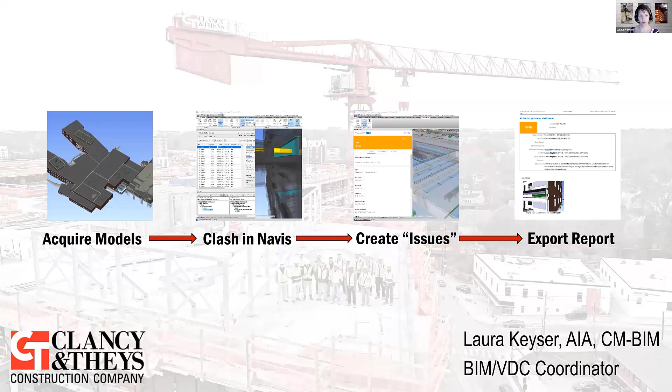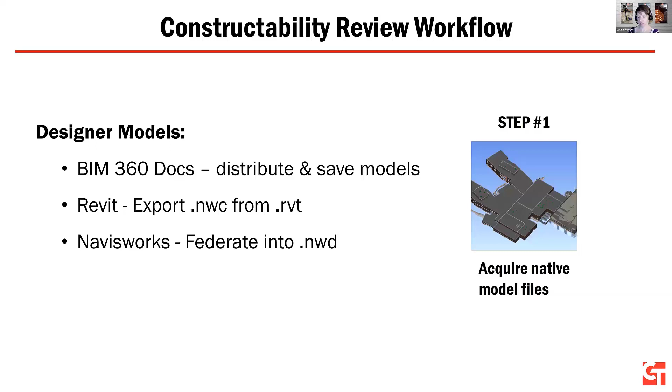Okay, so step one, I think we're all pretty familiar with this. So Ratio gave us access to their, and I'm using BIM 360 Docs, so same as what Scott said, just put cloud over top of any of this stuff to ease any confusion. So I was able to get their designer models. I just exported out NWCs. I did make an NWD file in Navisworks so that I could use this issue tracking.

Had all my models together, and then clash detection. Gautam kind of touched on this. I'm creating sets for major system comparisons. Anytime, like Heather and Gautam were talking about, doing this kind of review at design, you really have to keep in mind what you're looking at and what stage the design team is at to really eliminate a lot of false positives.

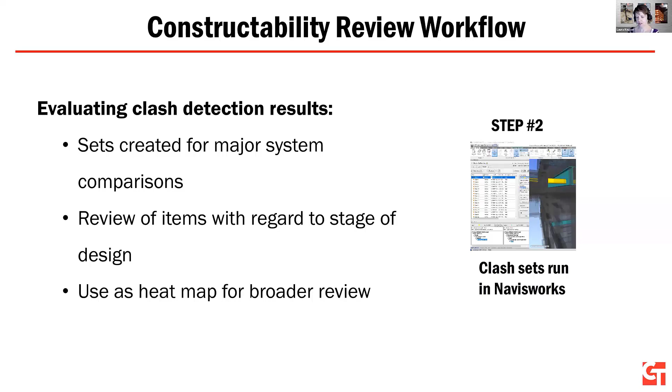I also like to use it really as a heat map for kind of a broader review of what's going on. So I ran my Clash in Navis just to get an idea of what was going on within this project. Okay, so the next step, here's where I'm actually using that coordination issues add-in with Navis. So in Navis, I can create an issue really easily. I'm going to show some screenshots of that.

But some other keys I did was I did save viewpoints, and I also took screenshots so we had an image to put in that report. So just some additional steps I was doing along the way to get the desired end result. Typically, we would do this just in Navis, make viewpoints, and then use something like Word to create the report.

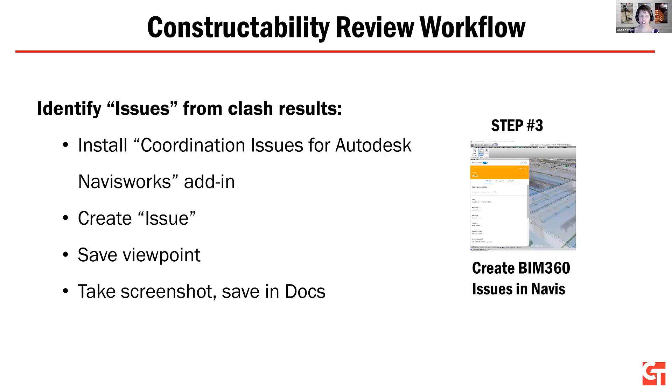We wanted to try issues in this project, which we are doing a lot more within the company in general, really moving to the Autodesk Construction Cloud. So this was a way to get our operations and pre-construction teams into the model, and it's a way to see the issues that we're creating.

So when I was actually putting together this presentation, I was trying to do another test, and I was like, why can't I create an issue in this other file I created? So a few things, like what you see here on the right, you can only use it for an NWD file you're opening through the desktop connector, or what Scott showed with the model coordination. So keep that in mind.

And like Heather mentioned, you also have to have the right permissioning. So same thing, I was like, why can't I create an issue? I didn't have permissions on that test project I was looking at.

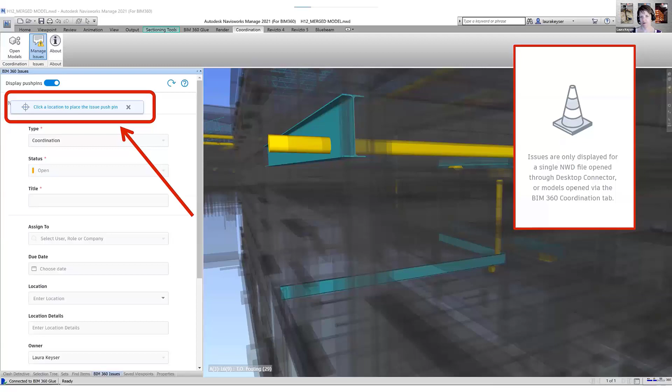So very similar to what Scott was showing, in this process we are just dividing clashes in here. We're not really using that. We really divide between constructability and coordination. And that way, as we're working with the design team and the owner, we can say, okay, these are coordination issues that we'll figure out, we want to identify them now because we can track them as we continue to go through design and construction.

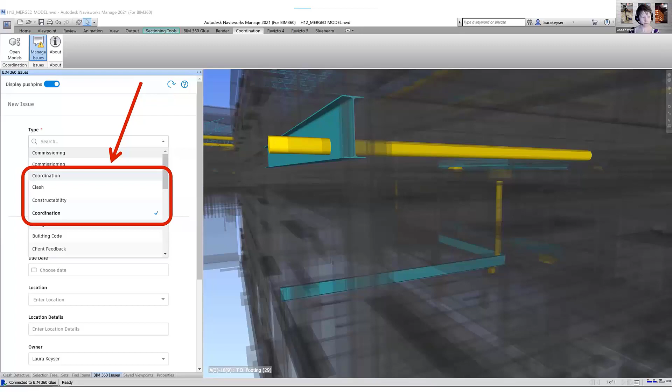Or this is a constructability issue that we really need to figure out now, like a situation like we're looking at right here. I also put in locations. I was kind of toying with this. It didn't quite work as I expected, I think because of how I pulled these models together, but it did give everyone a good idea of where we were talking about.

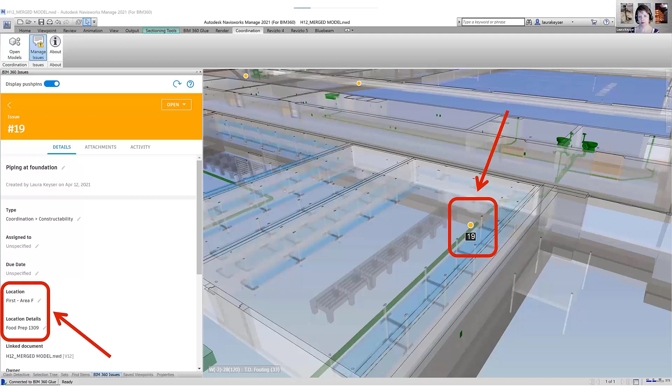So I create my issue in Navis with that push pin, and then I can see it in the model. And this is the point where I would take my screenshot in order to have a view of what it's going to look like. I'm also adding in a description. So all this information that Scott was touching on in his presentation, just to make sure that everyone knew what we had going on here.

So now I'm going to flip. Now I'm in BIM 360 document management, the model web viewer. So I go to my issue, and this is what I see. So this is why I've created these different viewpoints and screenshots, because it doesn't save any of the sectioning or any of the visibility settings, things that are hidden, transparencies, things like that.

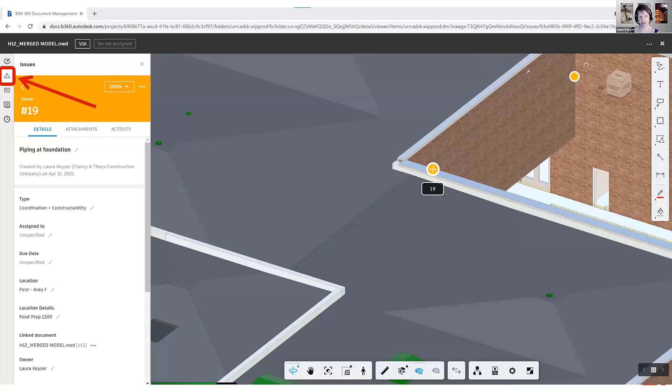But it does actually give all the information. So our project management team was able to come in here and see these issues. Within Navis, similar to what Gautam's doing in his typical coordination project, I was creating viewpoints for each issue and naming them the same number. So this was just a manual process just to keep it coordinated.

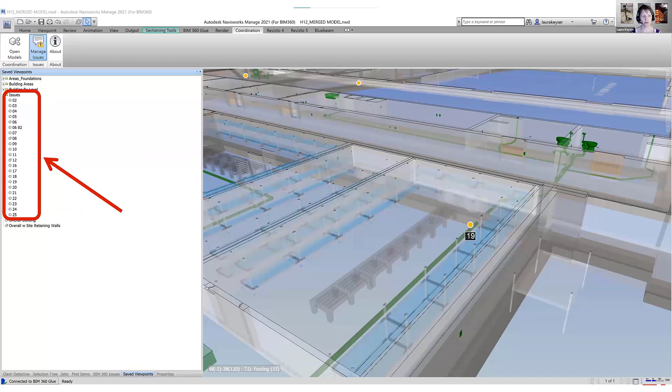It was really easy on this because there weren't a lot of issues we were identifying in this process. I might look at some other ways to do that depending on the scope of what I'm doing, but for this project, it actually worked out pretty good. Like I said, I'm then creating a screenshot and I am using the attachment feature.

So here I am back in the web interface. You can see my list of issues back here. I can create attachments and I can drag and drop different file types into here. That way, when I'm producing my report, I have that image of what the actual issue looks like with everything hidden and all my visibility settings and all that good stuff.

When I'm in this model viewer and I'm in my sheets and views, here I can see if I go to my issue viewpoint, it takes us right to the viewpoint. I think maybe Heather mentioned this, that overall the navigation in the 360 viewer is pretty easy, but because you can't save a view, sometimes it's hard for someone who's coming into a big model like this to just get started at a specific point. So by having these viewpoints, it just gives someone a starting point to move forward, especially when I'm talking about a specific issue. They can see it a little bit more clearly.

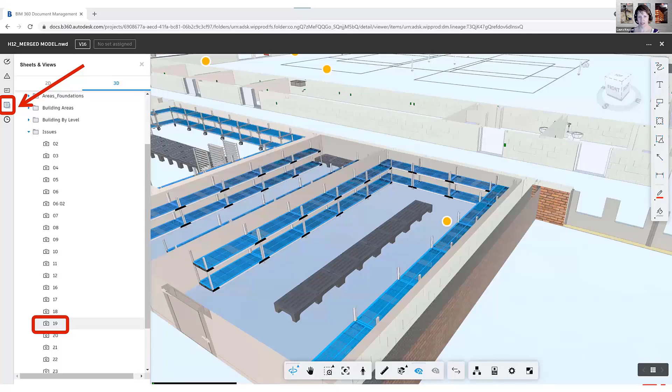Once we got all that done, then we had to run a report. So there are two different types of reports, which I found out, an issue summary report and an issue detail report. While I was actually working on this, we happened to have an internal VDC meeting. So prior to that meeting, I got in here. Here I am in document management. I go up to my export button and I exported a report. And this is what I got. And I was like, well, it gives me the title and the description, but I really want images.

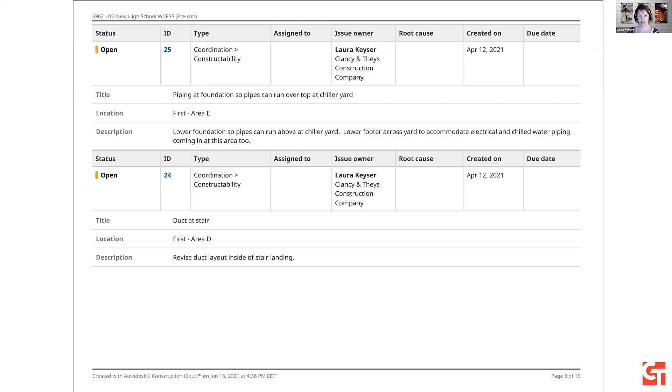And so I think actually Matt Rachers in this meeting today, he was the one who mentioned there's another way to do a report and it gives you all that other information. I wanted to mention this because it's really kind of hidden. So you actually have to go to the Insight tab, not Document Management, and then down on the bottom left, you see Reports. I never would have found this had someone not actually told me about it. Once I get in there, I then can create a report. Here I'm going to have a list of all my reports. And here's where I can choose between issue detail and issue summary.

So I chose my issue detail. I can run that. I have all these filtering options. I know Scott was talking about all this different information that we can put in. I can do that here. I can run the report. I'll get an email when it's done. And then at the end, I get this nice PDF. It still has more information than I'd want in there because I'm not filling out all this information, but for the most part, it was perfect for what I needed.

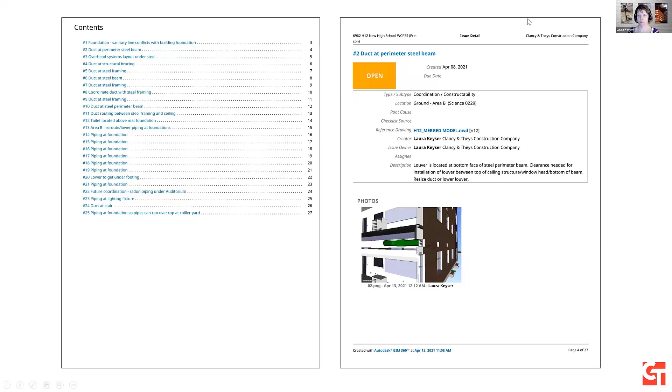A hyperlinked table of contents has my attachment screenshot in there, a link to the model, the description, everything that was needed. So all we did was we just sent this PDF as an attachment to the larger report that our pre-construction team is doing.

So just some takeaways from this particular process. It was a really easy integration into an existing workflow. The morning I started on this I was kind of crunched for time, and I was like, well, let me give this a shot, and it worked out great. It really expanded the use of our model within our internal project teams, which is kind of a goal of our department within really everything we do. But this is a good way to get the project managers in there. Like I said, the reporting feature was super easy.

The two issues that I had: creating those viewpoints obviously was a manual process. It would be cool if there was a way to keep that sectioning and view overrides when you're creating the issue. We've been talking with Autodesk about this. And because I had exported NWCs from Revit models and made an NWD, the issues weren't linked to any sheets because the sheets don't exist in that NWD file.

So that was something else I wanted to think about in the future, how could I possibly do this so that we can still get the issues in the model, but then also on a sheet, which would be even more critical if we're talking about more issues than just the limited number that we were going through here. But all in all, it was a really good experience. And like I said, I think this is a pretty good example of some low hanging fruit, just a way to get started with this process.